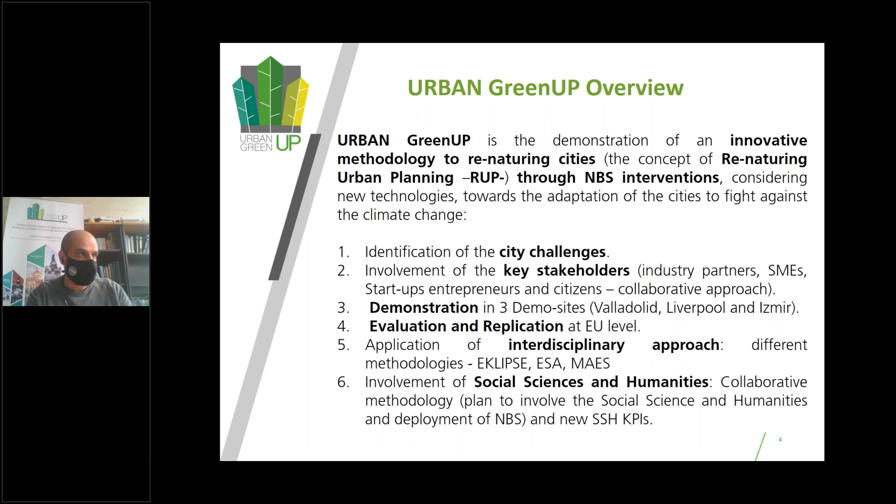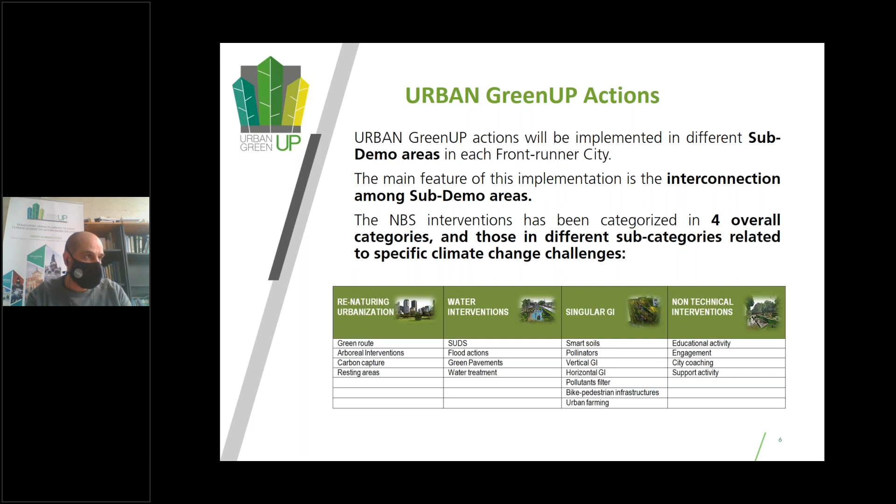This is the structure of our demonstration activities in the project. We are implementing nature-based solutions in different sub-demo areas in each frontrunner city. The main feature of this activity is the interconnection among sub-demo areas, and we have categorized the nature-based solutions into 4 main groups: renaturing urbanization, water intervention, singular green infrastructure, and non-technical action.

It's very important to remark the main impact foreseen in our project. We want to generate a new nature-based solutions market, generating and creating green jobs. We want to increase awareness of the benefits of renaturing cities and nature-based solutions to enhance stakeholder and citizen participation. We want to implement European environmental policies to generate healthier and greener cities, improving living conditions, fostering biodiversity, and also improving mobility and conditions in our cities.

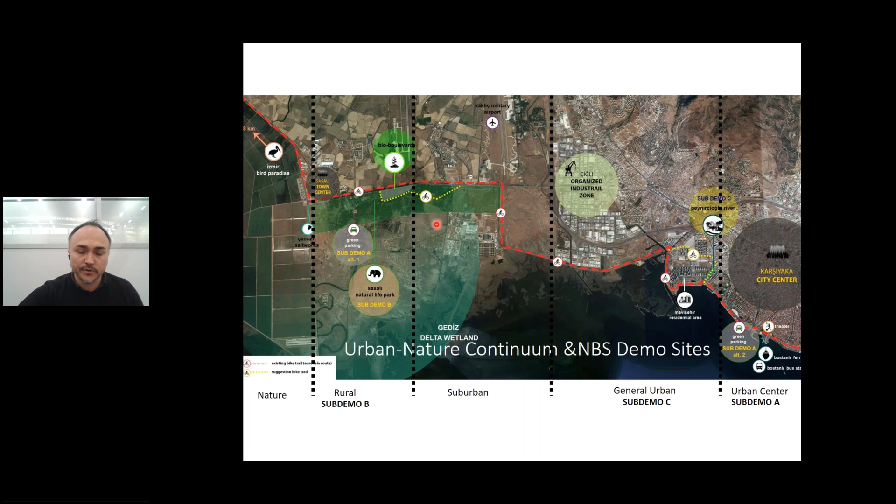We designed a green corridor that connects with the existing corridor and creates a network between rural areas and the city center. At the west part, you can see Çiğli, and there is a rural area of Çiğli, which is also a wetland using a salt work. This area is under threat of urbanization.

And in the areas of singular green infrastructure, we implemented nature-based solutions including smart soil into green shade structures, green covering shelter, green permeable pavement around car parking areas, green shade structures, smart soil production, nature pollinator modules, climate smart greenhouse, development of smart soils, green fences, and fruit walls.

The general impacts of these implementations are reducing the urban heat island effect, improving urban air quality, increasing plant cover and shadow surfaces, reduction of absorption and retention of heat with highly reflective or permeable surface materials, reducing ambient temperature, increased richness and abundance of pollinating species, and increased community engagement.

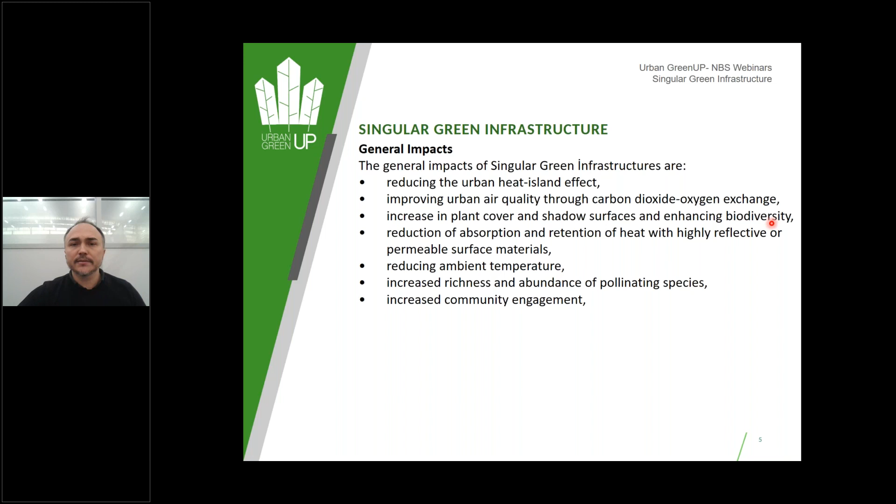The first implementation is the application of smart soil into green shaded structures. The benefits of green shaded structures with smart soils are measured in environmental, economic, and aesthetic or cultural ways.

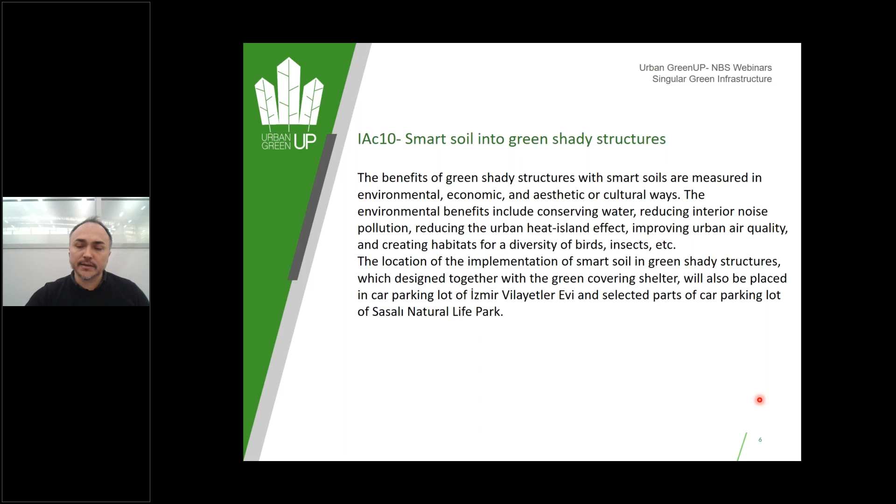We have two implementation areas: Sasalı Natural Life Park here and the Vilayetler Evi car park area here. In Sasalı Natural Life Park, we implemented 338 square meters, and in Vilayetler Evi, we implemented a 150 square meter area of smart soil.

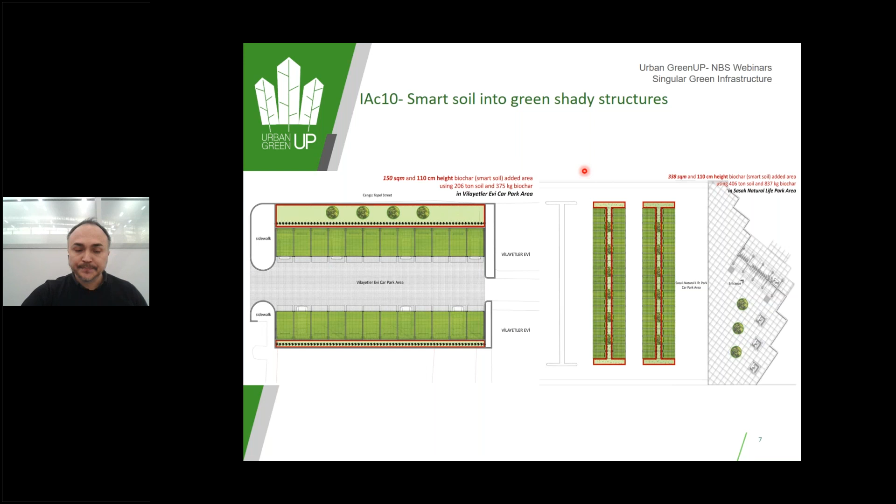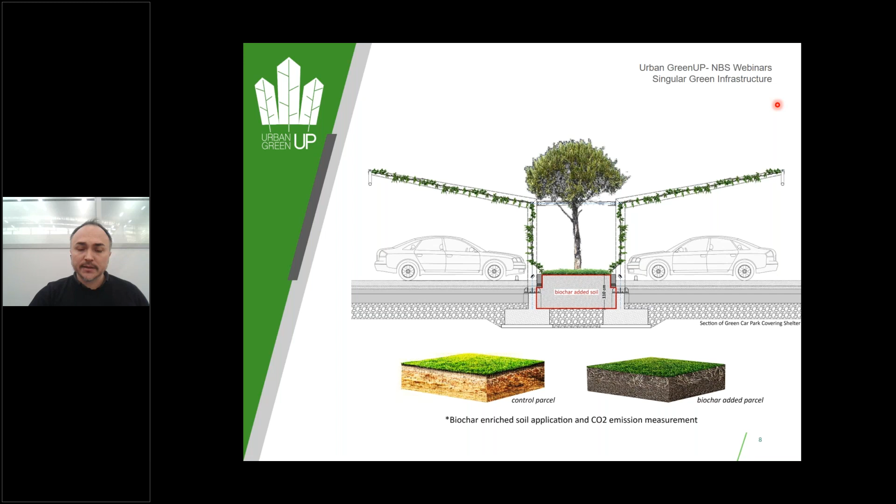As seen in this section, smart soil is applied on the surface of the area where the ivy structures are planted. The height of the soil is 110 centimeters. And you see the application process of smart soil here.

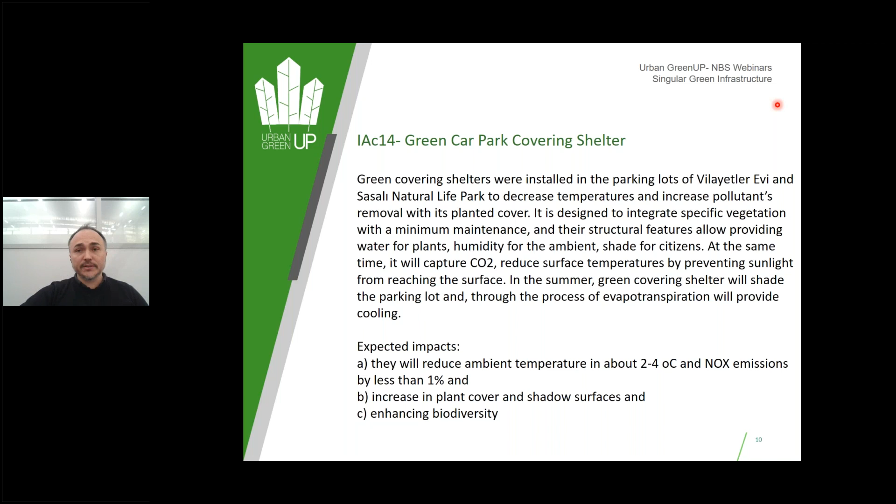Green covering shelter: the shelters were installed in the parking lots of Vilayetler Evi, the same with the smart soil, and Sasalı Natural Life Park, to decrease temperatures and increase pollutant removal with its planted cover. It is designed to integrate specific vegetation with minimum maintenance, and its structural features allow providing water for plants, humidity, and ambient shade for citizens.

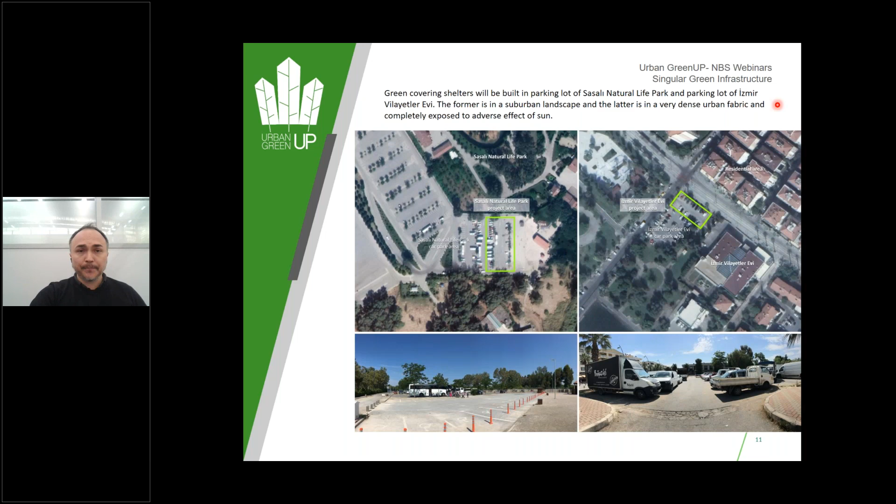Same as the previous implementation, we have two demo sites for this section. On the left side you see the Sasalı Natural Life Park, and on the right side you can see the Vilayetler Evi car park area. This is one of the final views of the green park covering shelter. As seen in the photo, it is planned that the ivy structure will cover the whole roof by climbing this structure.

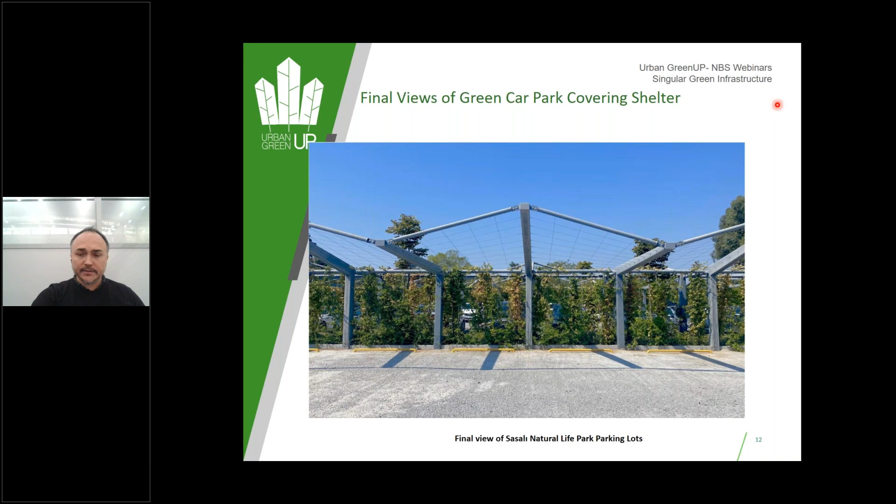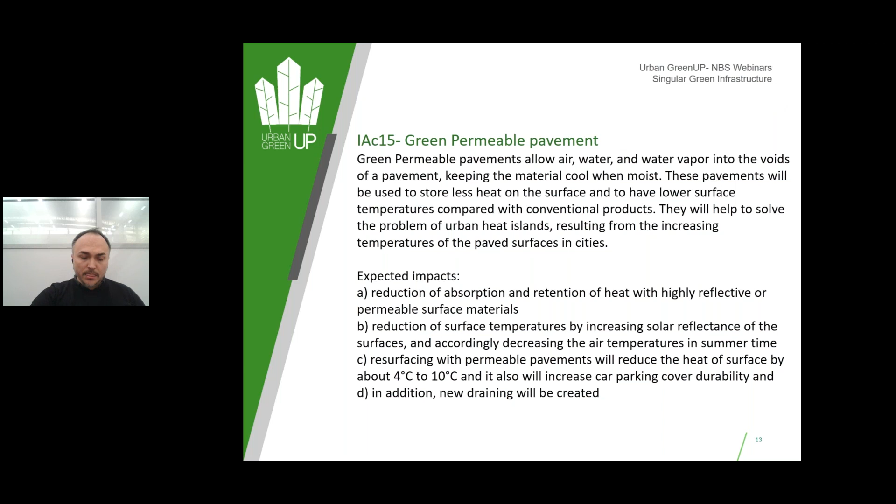The other implementation is application of permeable pavement surrounding parking lots. Green permeable pavement allows air, water, and water vapor into the voids of the pavement, keeping the material cool when moist. We implemented two different types of permeable surface here. In Sasalı, we preferred permeable concrete, and in Vilayetler Evi we used cube stone, a permeable cube stone.

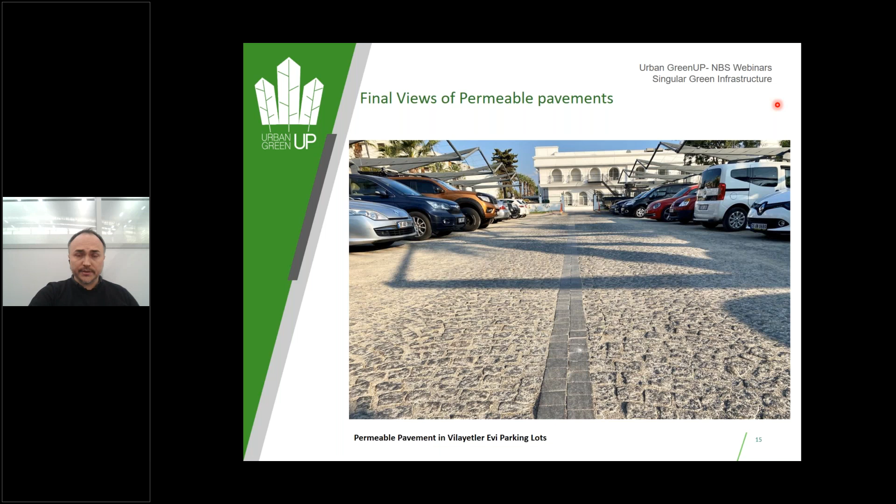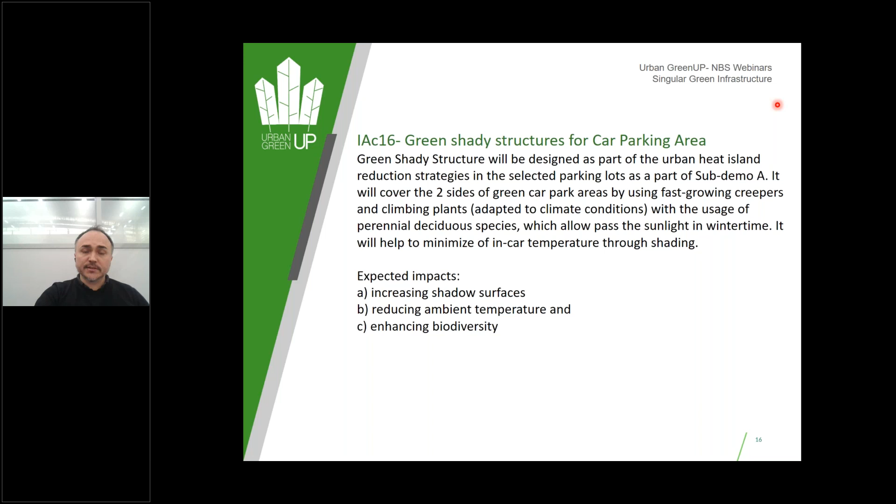Another implementation is green shady structures in parking lots. This implementation helps increase the shadow surfaces in parking lots. The ivy structures are designed to be planted 3 roots for each 1 meter length of the wall of the green covering shelter, and planting will be done by investigating different conditions of the green covering shelter, such as the angle of sunlight, sun shadow ratio, and amount of space for plants.

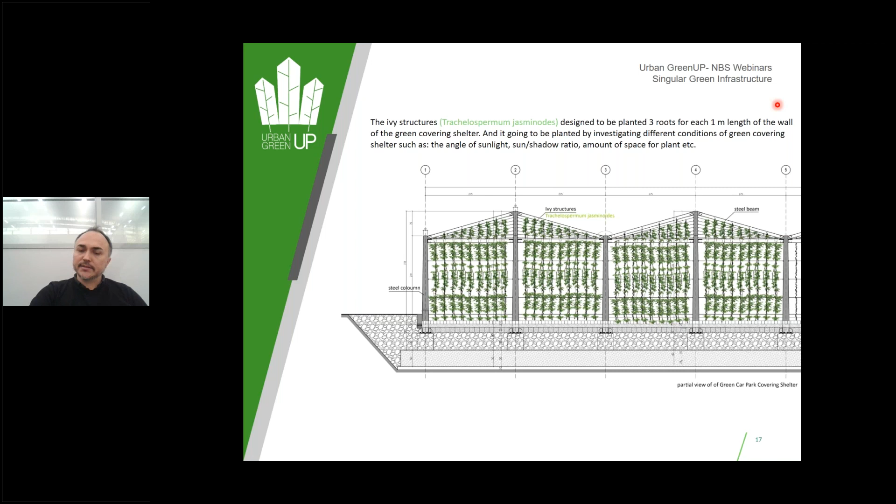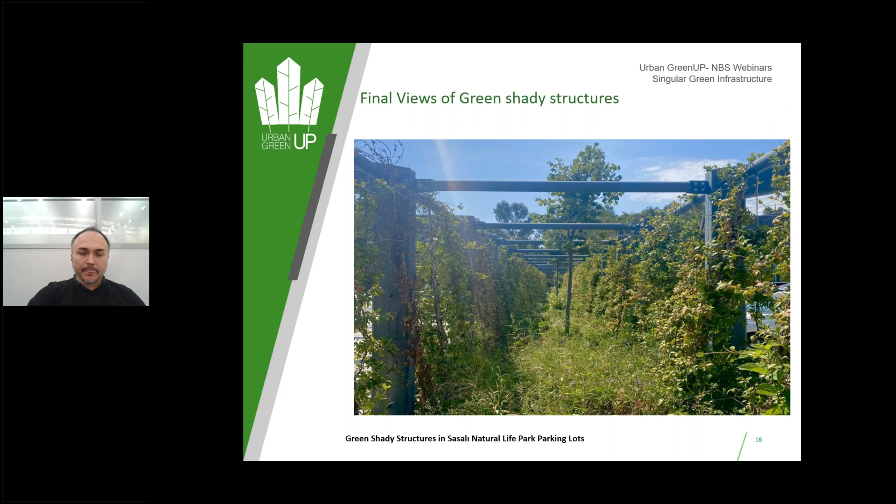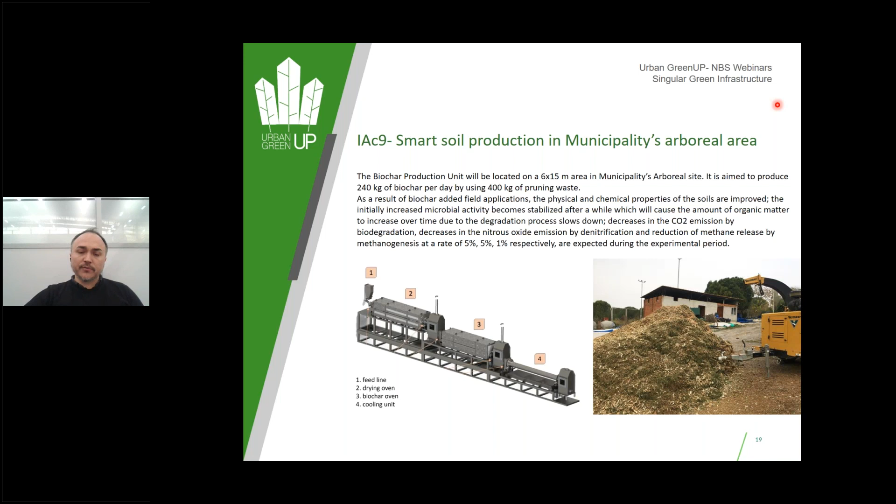Smart soil production unit, biochar production unit, will be located on a 90 square meter area in the municipality's arboreal site. It is aimed to produce 240 kilograms of biochar per day by using 400 kilograms of pruning waste.

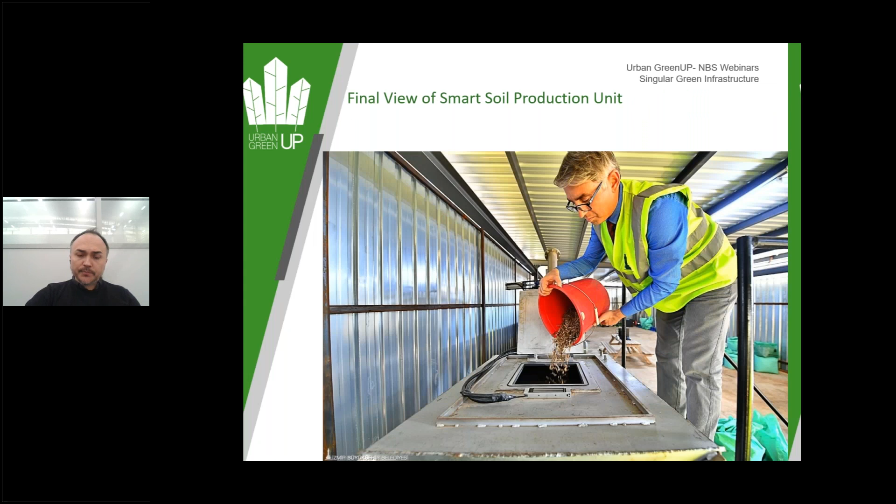These are the final views from the biochar production unit. First, we put the pruning waste into the production unit, and after 1 hour of combustion in an oxygen-free environment, biochar is obtained. Then we use biochar in landscape.

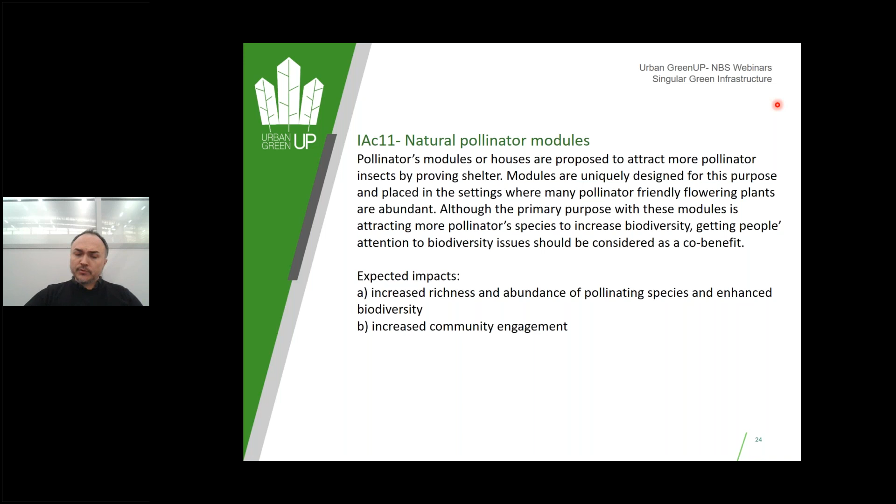Another implementation is natural pollinator modules. There are 10 modules alongside Bio Boulevard in Sasalı and around Peynircioğlu stream. The main purpose of this intervention is attracting more pollinator species to increase biodiversity. This is the final view from pollinator modules from Sasalı.

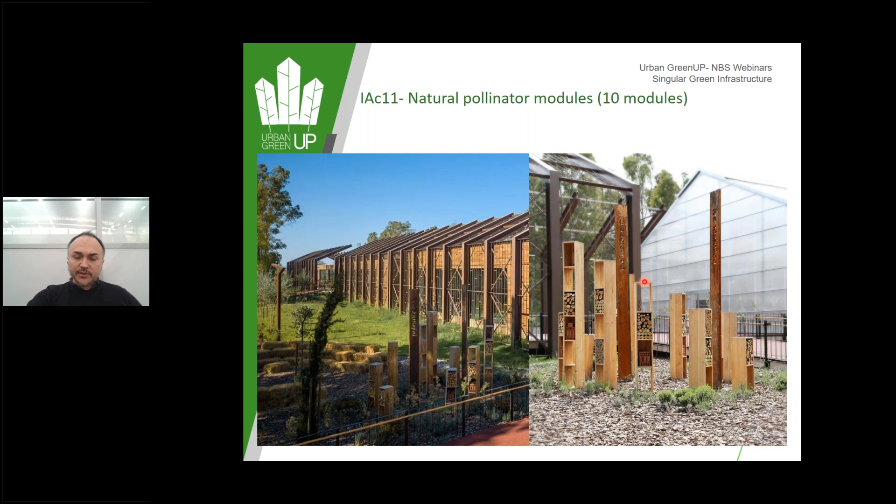The aim of this is to increase the efficiency of pollination in those modules. We plant lavandula around them. We located oak wood, pine cone, bamboo, perforated brick, and willow branch inside the modules to accommodate different species of bees and bugs. And this is another final view of the pollinator house module around Peynircioğlu stream.

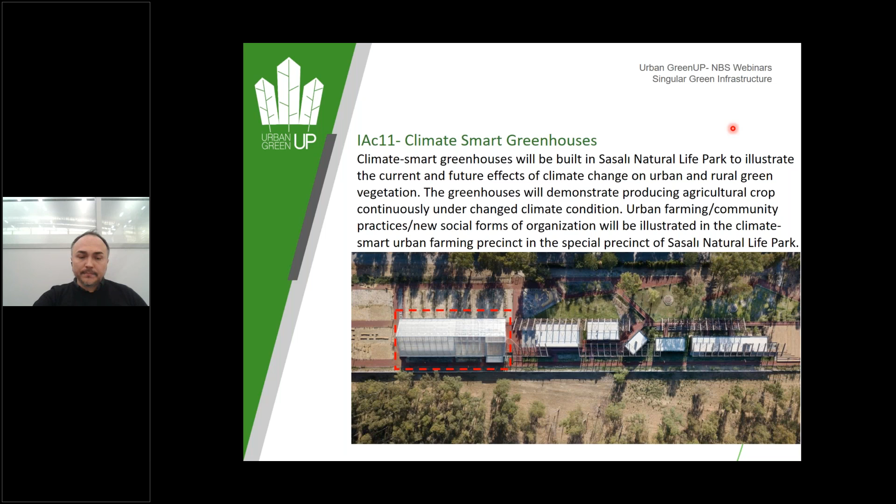Climate smart greenhouses: the greenhouses built in Sasalı Natural Life Park as part of Izmir Agricultural Center. This intervention illustrates the current and future effects of climate change on urban farming. We use 3 layout plans here.

In part 1 here, the smallest greenhouse, 167 square meters in size, demonstrates the effects of changed climate conditions on soils and plants. The second part is about 216 square meters and demonstrates the parabolic solar heating system and also the use of solar energy for lighting.

And there is the soilless agriculture system here. The biggest one, the last greenhouse, is approximately 540 square meters, and vertical agricultural production units are planted here.

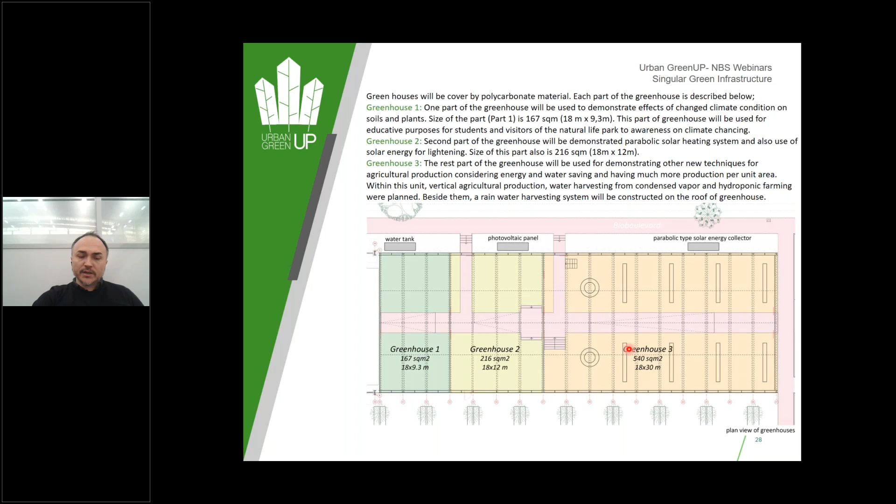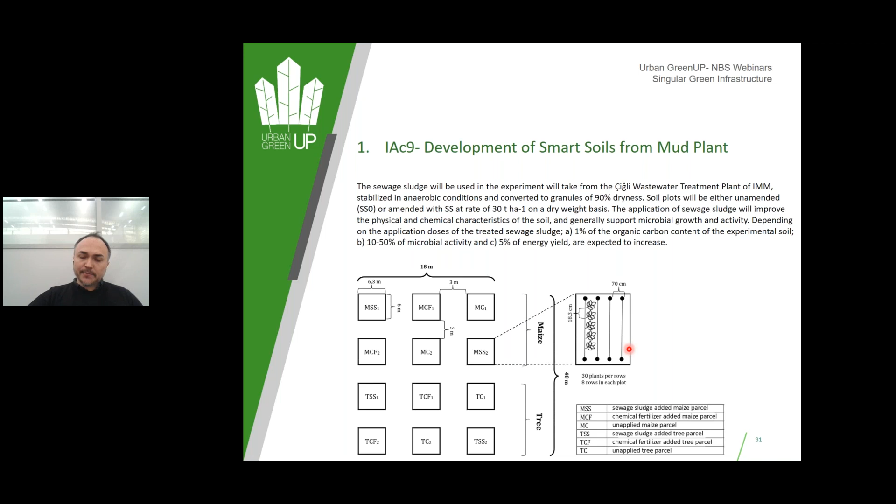Development of smart soil from mud plant. The raw waste which will be used in biochar production should be considered for different purposes of application. This is a diagram of the invention plan. We use maize plants and trees to compare the implementation parcels with each other.

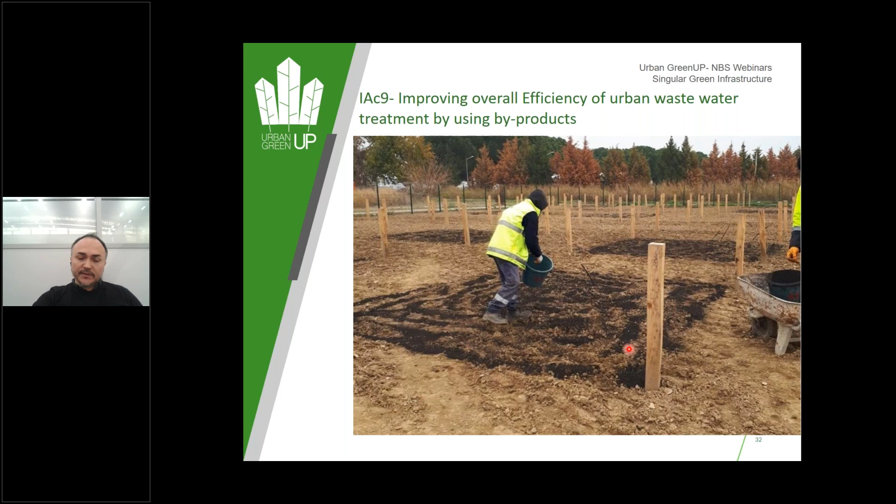This is a view from implementation progress of the maize plant agriculture area and preparations of our experimental field area. The next process for the area surrounded by fencing is the parcellation with a drip irrigation system. And these are the final views from the agricultural parcels.

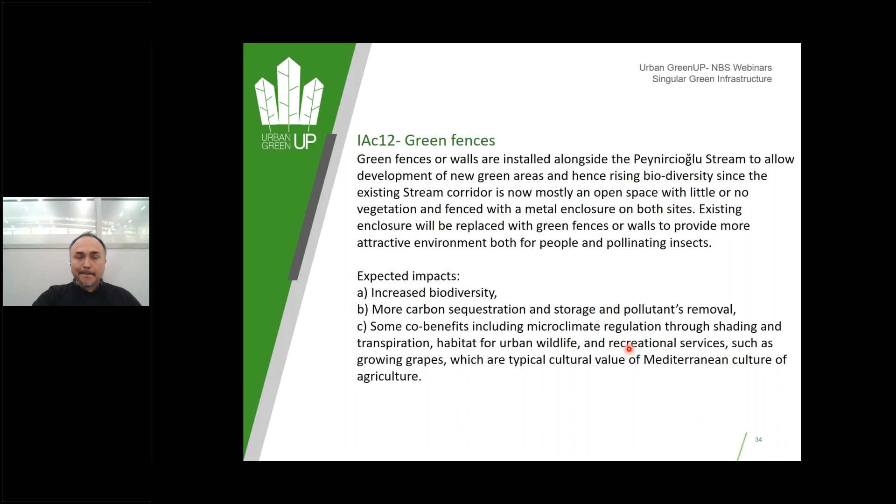Green fences are installed alongside the Peynircioğlu stream to allow development of new green areas and rising biodiversity, to provide a more attractive environment both for people and pollinating insects. This is the final view from the green fences. The ivy structures are starting to cover the fences. In some part of the area, we take away the green fences from the stream to create new green areas and vegetation areas along the stream.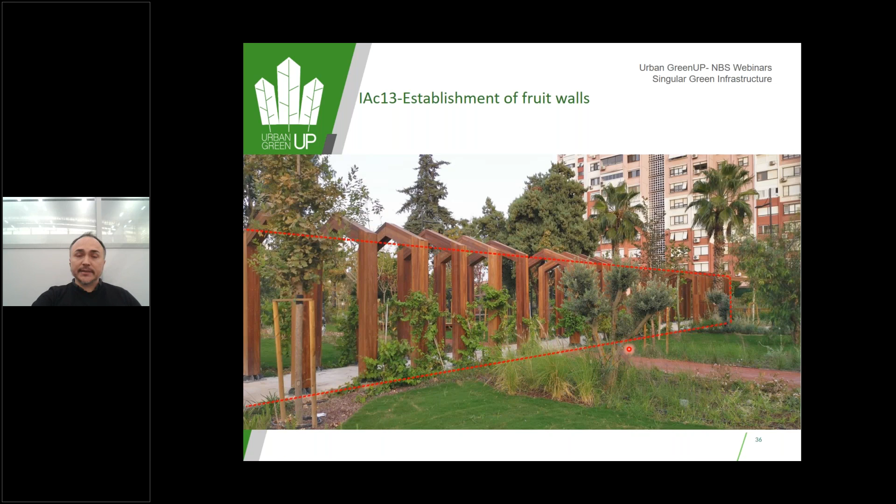Fruit walls are planted along decorative wood shelters in some parts of the area. Grapes and blackberries are planted here, and they cover these areas. This is a view from the wood shelters, and you can see the grapes here. This is a view from the launch area. The back of the launch is used as fruit walls, where grape and berry plants are also planted.

Thank you for listening to me.

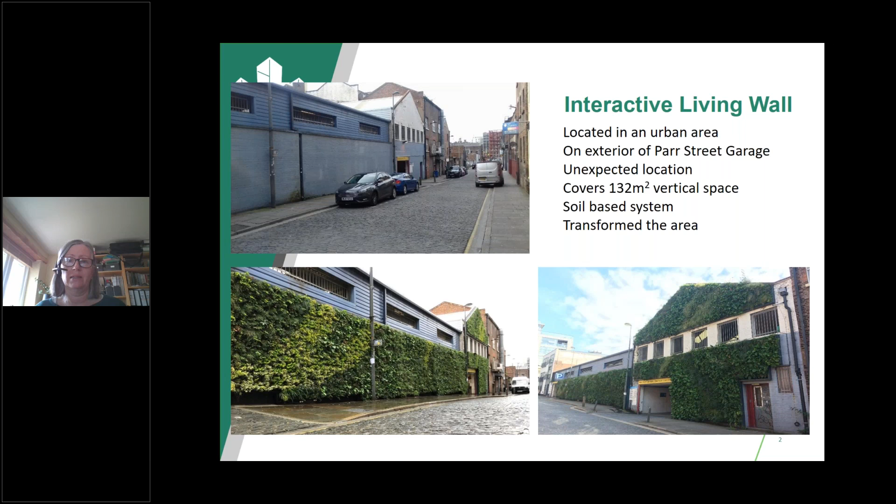This green wall covers about 132 meters squared of vertical planting. It's a soil-based system, irrigated by mains because we're unable to collect enough water from the roof to put in rainwater harvesting at this site. The planting itself has over 12,000 different plants, 19 different species, and we have something we call monthly discovery planting. What that means is that throughout the year, as you walk along this road, the green wall changes in terms of the plants you can see.

We start in the spring with early things like daffodils on the top left. We have a range of flowering plants, and towards the winter months, we have things like red-berried plants. This makes the wall constantly interesting, and it's interactive because you can get up close, you can touch it, and in the summer you're actually able to pick strawberries from the wall as well.

The green wall's become something of a landmark in our city. It forms part of our green corridor route, and it's now featured in a number of city and city region promotions, competitions, and publications. Most recently, it was used as a commercial to encourage girls into science. It's had lots of attraction, lots of publicity, lots of photography. People go there quite often to get their photograph taken. We've also had a number of inquiries from developers keen to replicate something similar.

You can see here that the wall focuses very much on foliage types. The wall doesn't have the best sunny aspect, so we are limited on the types of flowering plants, but we've still been able to create quite a lot of interest with the different planting.

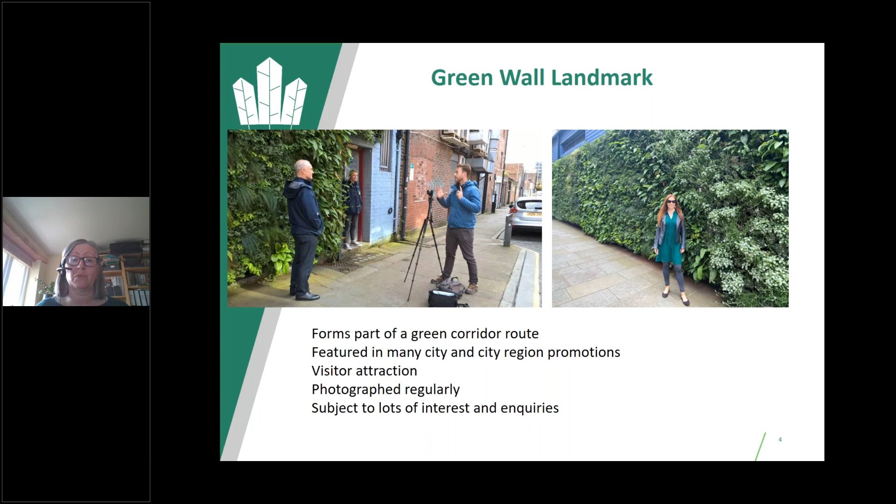In terms of other vertical greening, one of the other innovative solutions we've been testing is something called the Smart Pollinator Pillar. This is a planted system that wraps around a street lamppost. It has a solar panel at the top and a black irrigation reservoir at the bottom.

The solar panel powers a very small submersible pump that pumps water up and irrigates all the planting. The planting irrigation reservoir at the bottom, the black bucket, has a small sensor that connects to your phone and lets you know when the water level is low. We have a mobile app that helps to control irrigation.

You can plant lots of different types of plants. We can plant for biodiversity and pollinators, for colour and impact, or we can put in species that will help to improve local air quality, for example. You can also add insect homes or bird boxes.

We don't actually have a bird box on this one. That's a fake bird box that's actually hiding the pump, but you can include them on some of the other ones. We've used these as route markers for green routes, and we've also used them to introduce biodiversity as stepping stones in urban areas where it's been almost impossible to retrofit anything else.

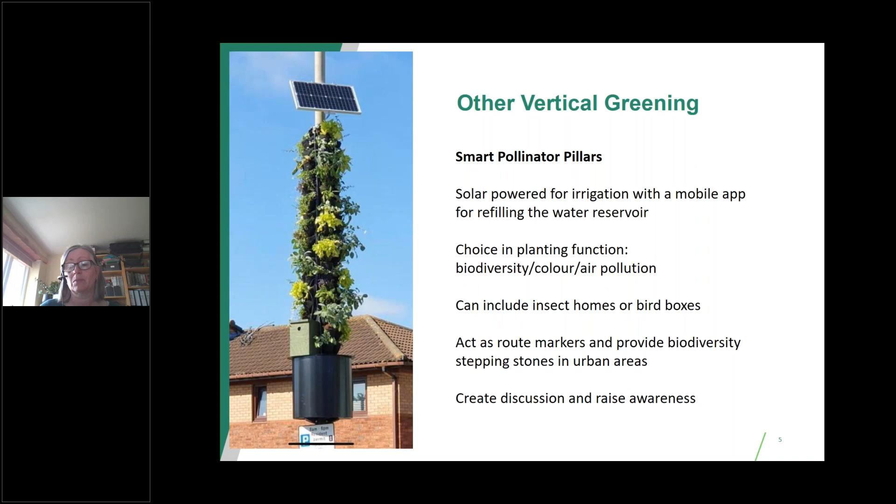They've been very good for creating discussion and raising awareness. We've had some issues over the winter with them, but I'm hoping that now we're coming into the summer months, we'll have some good colour and be able to see how effectively they can perform.

This is a freestanding, roughly 2-metre high green fence that will be planted in a key retail area adjacent to a very busy road in the city. We're going to be looking here both at the biodiversity impacts this can have, but importantly, we'll be looking at the air quality impacts.

We'll be undertaking monitoring in front of and to the rear of the wall, and also mathematical modelling, comparing the two. We think this wall will have an impact on dispersing the pollutants from the vehicles on the nearby road.

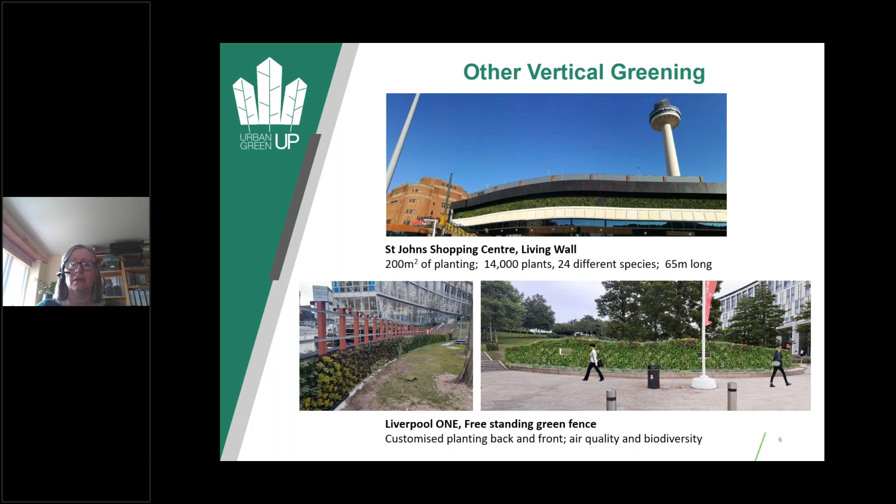We complemented this by working with a TV program that repurposed an old cabinet and added some habitat features to create a bug hotel. Now the pollinating insects that come to feed on the plants also have some shelter and somewhere to overwinter, which is really important. That repurposed cabinet is also now on that balcony.

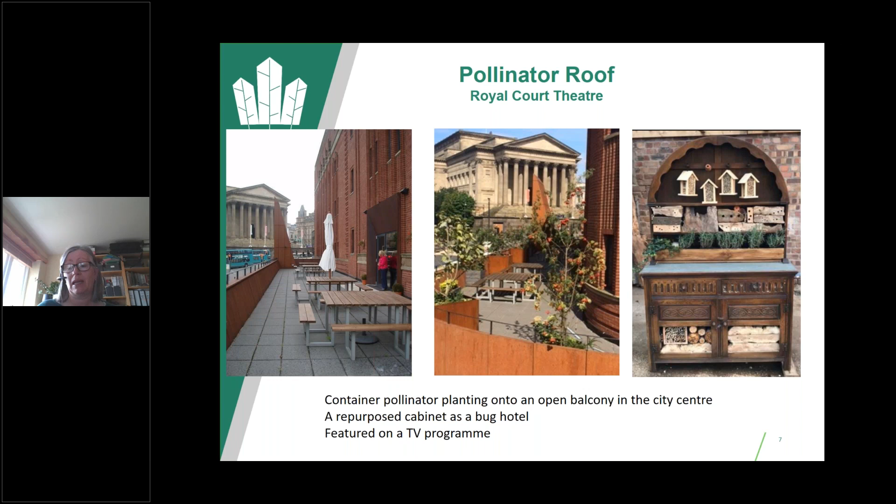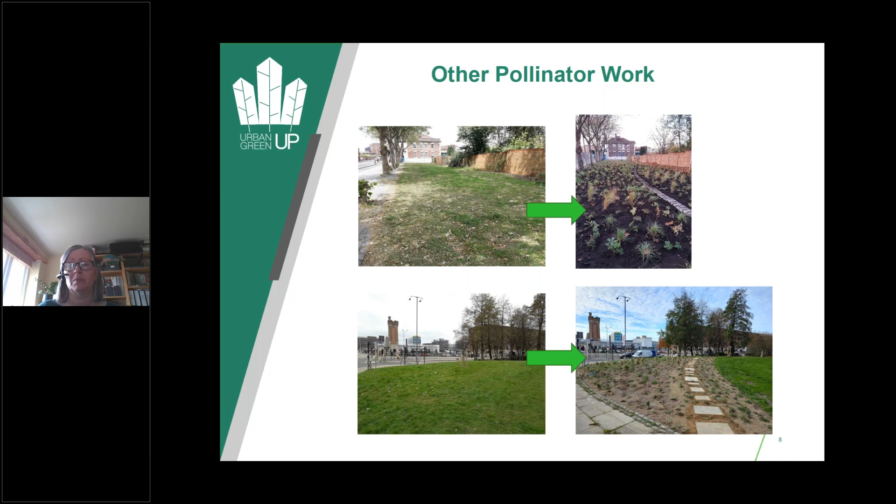Where we have done our sustainability pollinator works, we've tried really hard to use as many sustainable techniques as possible. We've used organic seeds and plants, reused materials between sites, and tested some different ways of preparing the site, including using a flamethrower.

That was very useful for areas around tree roots where we couldn't dig very easily without damaging them. We've also done some quite deep turf stripping, shown in the bottom left picture, to help remove the weed seed bank and discourage weeds. And in the bottom right picture, we've tested a range of acetic acid or vinegar mixes to look at weed clearance. Unfortunately, they ran out before they quite finished.

So I do have a demarcation line between the two. We would need a couple of applications, but the acetic acid is much more friendly, and all of those are much better than using chemicals or herbicides. Elsewhere, the top left picture shows some other examples where we've used natural products like jute netting to retain moisture and suppress weeds on sites. So that's been quite an important element of putting these pollinator sites in.

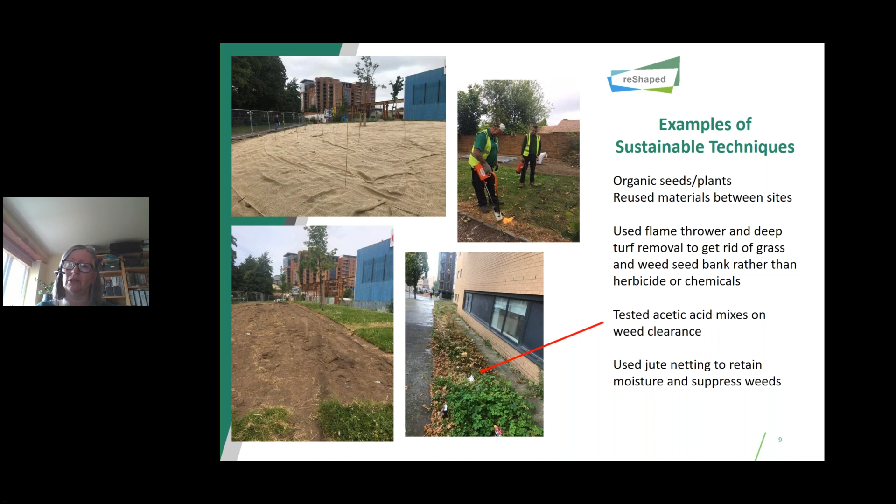In terms of data, we've generated lots of data, got lots of graphs and lots of observations. It is still being evaluated, but it's looking good. We're looking not just at pollinators, but also at things like thermal imaging and air quality, and we're hoping to build up a story for each of the different interventions over time.

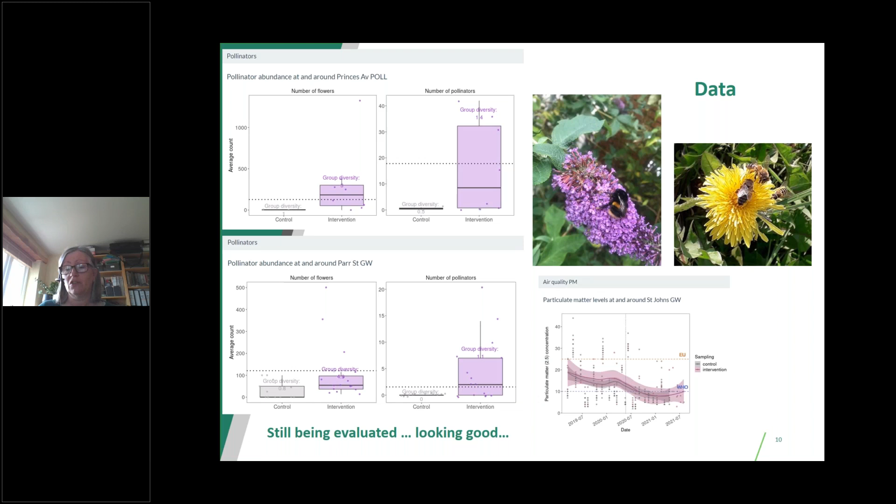I just wanted to finish quickly on one of the other ways we're using and analysing our data. This is a model working with Liverpool John Moores University called EcoservR. The way this works is we have seven ecosystem services listed, from accessible nature right down to water purification, and then values against them, which are percentage increases from the baseline.

In each of the demo areas shown on the map to the right, marked by black lines, with the green areas being additional sites we've worked with, we made an assessment of the natural capital value for those ecosystem services in that area before the project started.

Since then, we've introduced a range of different interventions, and we are now calculating the percentage improvement in that area as a result of these interventions. The reason this modelling information is so helpful is that many of our interventions took place during lockdown and COVID.

So if, for example, in top demo area B we had recorded a 15% improvement in air purification or air quality, many people would quite rightly argue that that was a false data set because it's been heavily skewed by the fact that people were in lockdown and vehicles weren't moving around the city. And they would be right. But what this modelling allows us to do is place our information in context.

So if we have monitored a 15% improvement, I'm able to say, looking at the air purification figures, that half of that improvement is due to nature-based solutions and the other half is an impact of the COVID lockdown. This is going to be really helpful to help us make sense of our data during some difficult times.

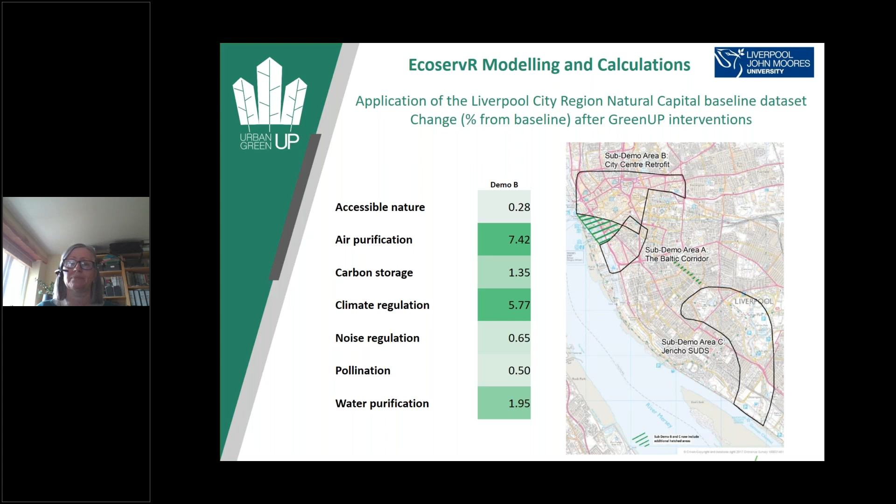The other thing I like about this model is that we're able to show this visually. So this is about pollination capacity in demo B again, with yellow being areas of really high pollination capacity. And if you look in the center there, we have a small cluster of circles, though I don't know whether you can see them just here.

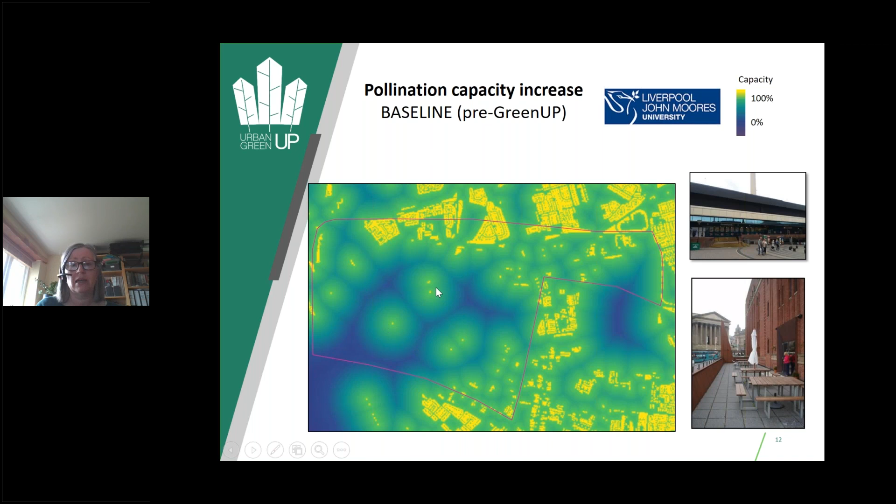They represent the before, that's before the green wall and before the pollinator roof. But then, post the pollinator roof and green wall going in, we see this new circle appear, and we have this almost visual demonstration of a whole new area of really high pollination capacity as a result of the wall and the roof. So that's going to be really helpful.

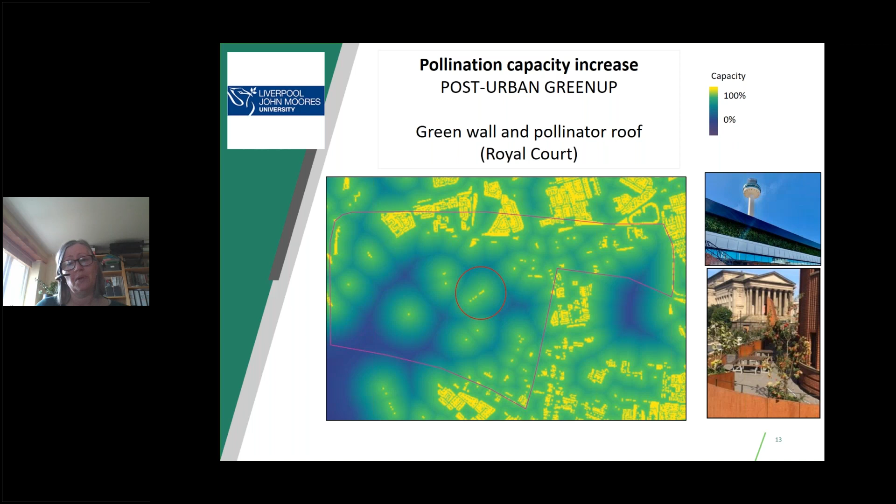So that's all I've got time for, but I hope that's given you a bit of an insight into some of the work we're doing at Liverpool. If you've got any additional questions, please do contact me and get in touch. Thank you very much.

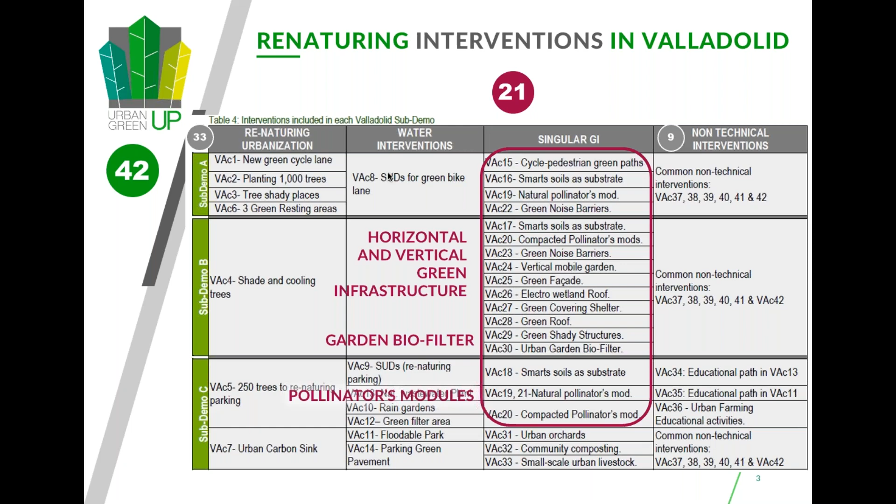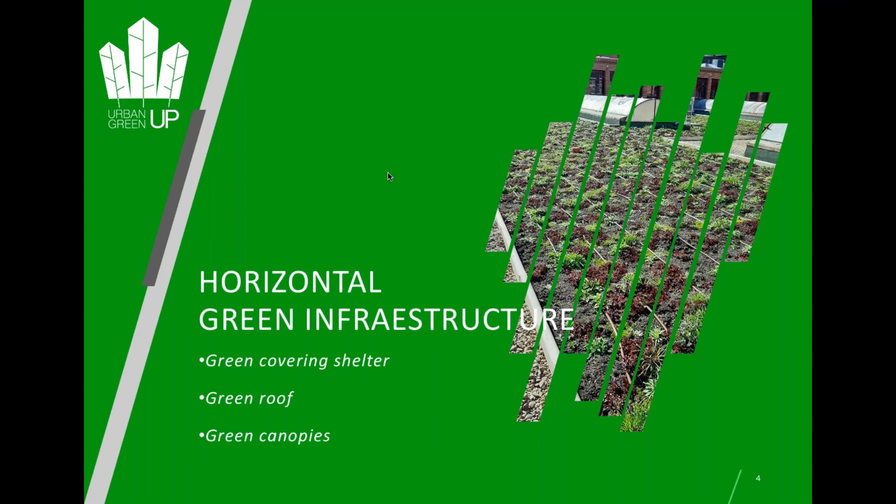So let's go to the horizontal green infrastructure. I will show you three examples: the green covering shelter, the green roof, and the green canopies.

This is our green roof in España Square, our green covering shelter. Below the covering shelter there is a daily fruit and vegetable market, and it's a very well-known place in the middle of the city.

The green area does not cover all the marquees because they are quite old infrastructure, and this infrastructure wouldn't support the extra load of the green coverage, although it's very light. The total area is almost 500 square meters, and in the rest of the square there are no other green areas apart from some plants in pots. We can see along the year how it changes between brown, green and yellow colors, because it has different species and different flowering along the year.

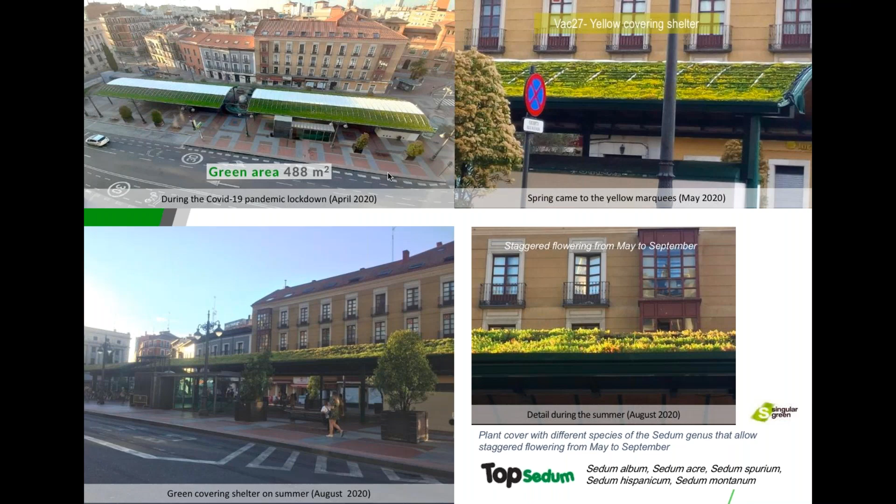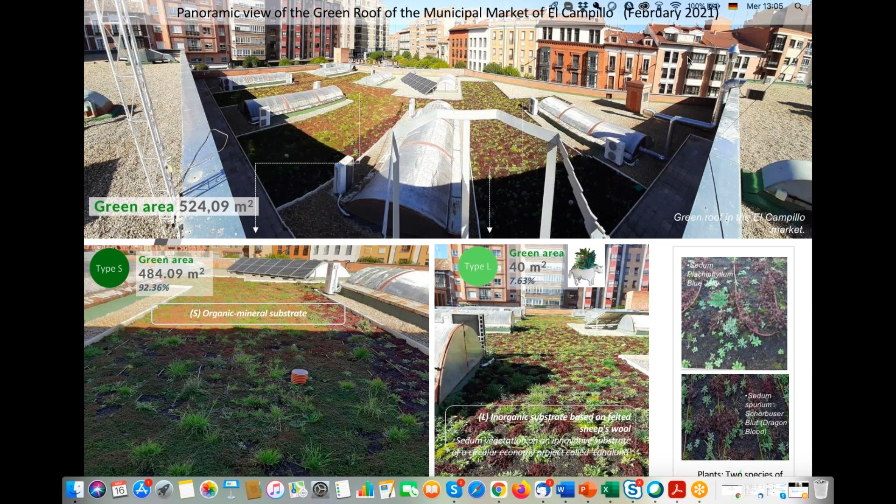Another example is something we have implemented here - it jumped two slides but it's okay, there was an animation that changed by itself. You can keep it here or go back to the previous one - let's see, yes, just stop here, I can continue from here, it's perfectly fine because here you can see what we have implemented.

The previous slides showed how it was in the ex ante scenario - this is a municipal market named El Campillo with a completely horizontal surface which was not used, and was in a very bad state of conservation. We constructed this new green area of 525 new square meters, planted with two different types of native sedum. This coverage is very light, like the previous one, and we are comparing the growing of these two different types of species, shown in green color and red color. This new green area is on a roof, and it's completely walkable.

You can walk through this roof, and we expect delivering some non-technical activities here in the future with citizens and students and so on. We are using two different types of substrate to demonstrate the differences between them, so it's also like some kind of research study.

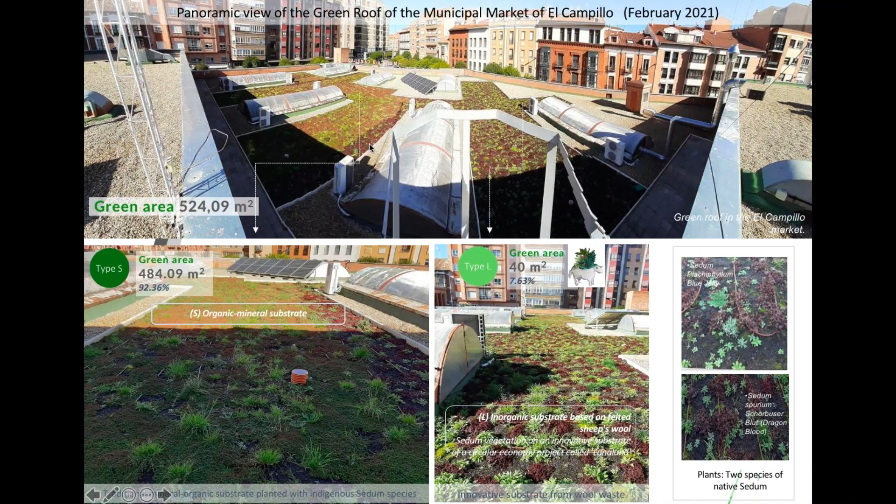It will happen the same here - we've jumped directly, but it's fine. These are our green canopies, a very innovative green infrastructure. The previous three examples were designed by one of our colleagues in the URBAN GreenUP project. The company is called Singular Green, and they also designed this very innovative technology of implementing canopies and covering them with green. Along the street, these canopies are 21 units in one street of the city center of Valladolid.

It's also planted with plants that make this type of curtain. This photo was taken last summer when this green curtain was very long and quite impressive. What we see now, although we didn't see this green curtain in winter, we noticed it has flowered again - we see the violet and white colors of the green canopies. So I invite you to come to Valladolid to see this magnificent intervention.

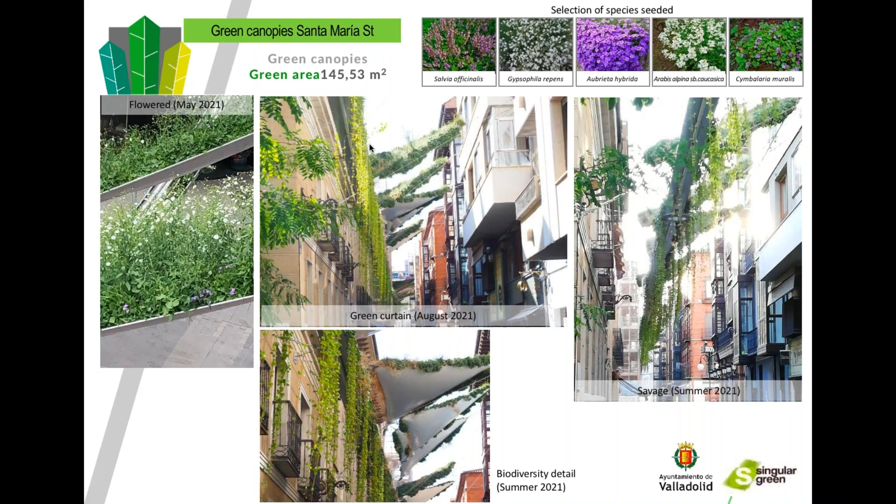Let's go to the vertical green infrastructure - three examples: the green facade, the vertical mobile gardens, and the green noise barriers.

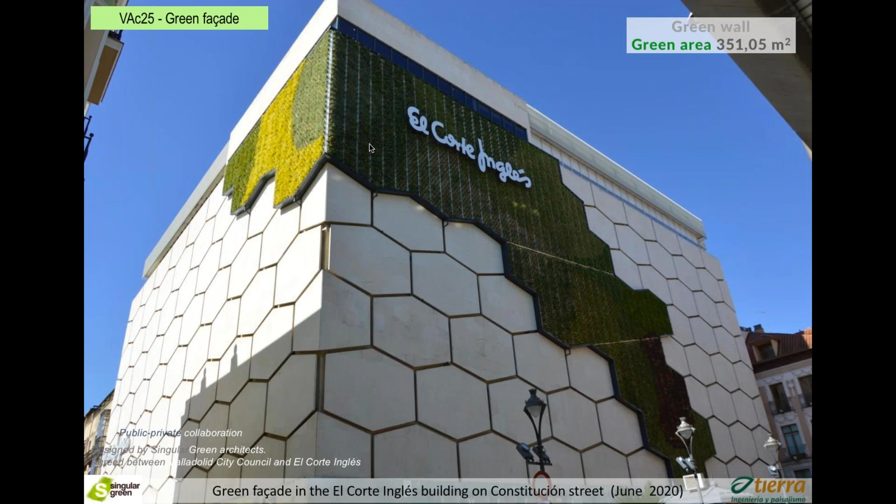This is the ex ante, how the building of El Corte Inglés department store looked before the implementation, and this is how it looks now. This photo was taken when it was recently planted, two summers ago in June 2020. Now the vegetation has grown up, so it's even more impressive. It's developed on a private building that belongs to this department store.

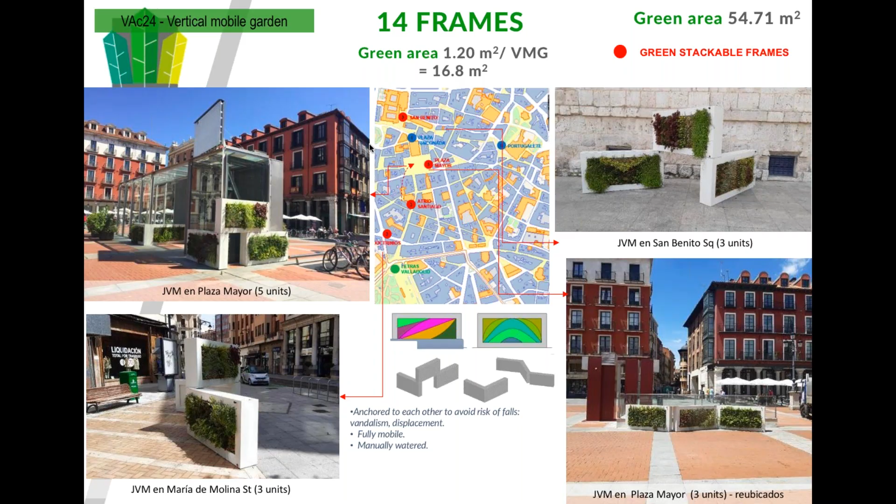The green noise barrier has a double benefit expected from this innovative green infrastructure, also designed by Singular Green. The first objective is acting against noise, and this barrier is located in the middle of a road with a lot of traffic, with two streets to one side and two to the back. It has been studied as a street with a lot of noise according to the noise map of Valladolid.

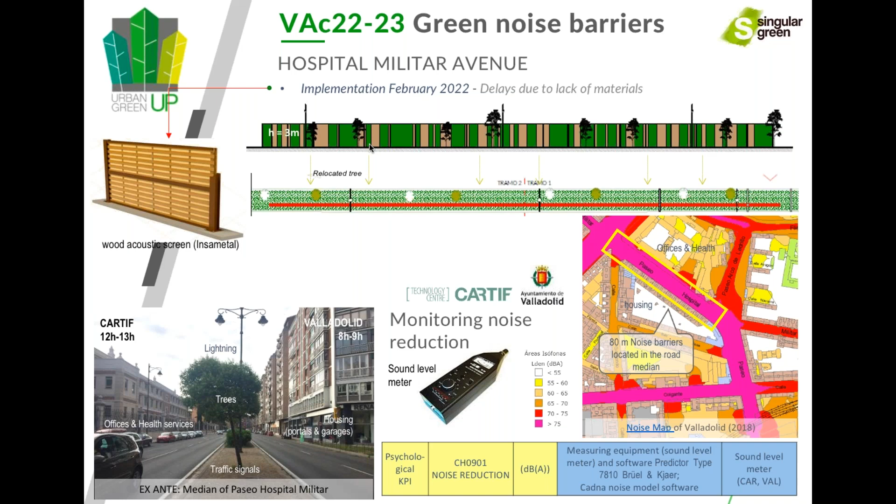Here are a few photographs of these new green noise barriers. It was recently planted, so the plants are small; we finished this implementation last month, and this photo has about 15 days, so we expect to see in spring how this green infrastructure grows. It's a typical noise barrier, but instead of metal it's constructed of wood, covered partially with vertical garden panels. The total green area is almost 300 square meters, with 80 meters length and 3 meters high.

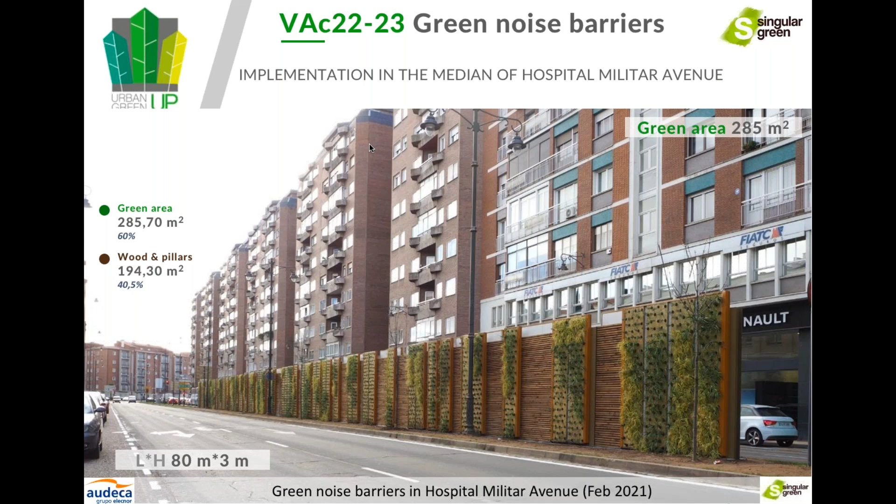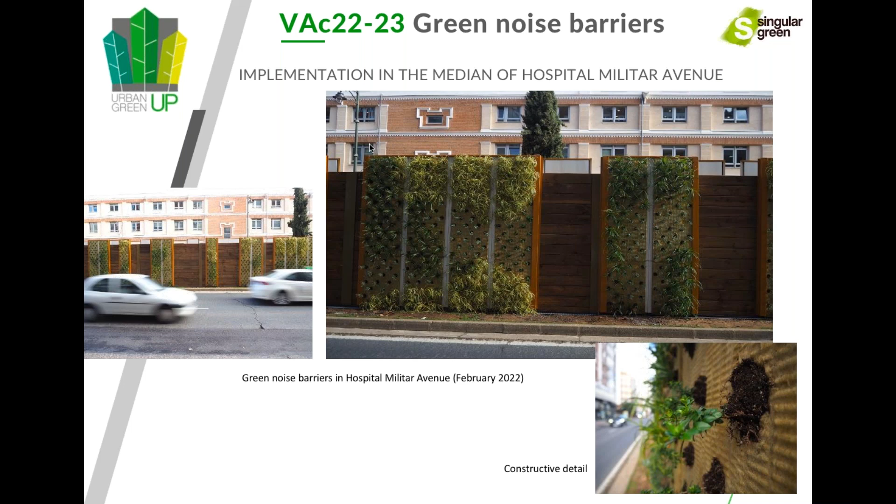Some photographs show the aspect of the cars in front of the barrier, and some details of the plants. We expect that it will grow very well.

Let's go to the urban garden biofilter. This singular green infrastructure has been designed by Cartif Technology Center, who are also the coordinators of the Urban GreenUp project. This innovative infrastructure aims to clean the air extracted from an underground parking, so it's not a normal garden. What it does is clean the air, retaining particles and nitrogen oxides.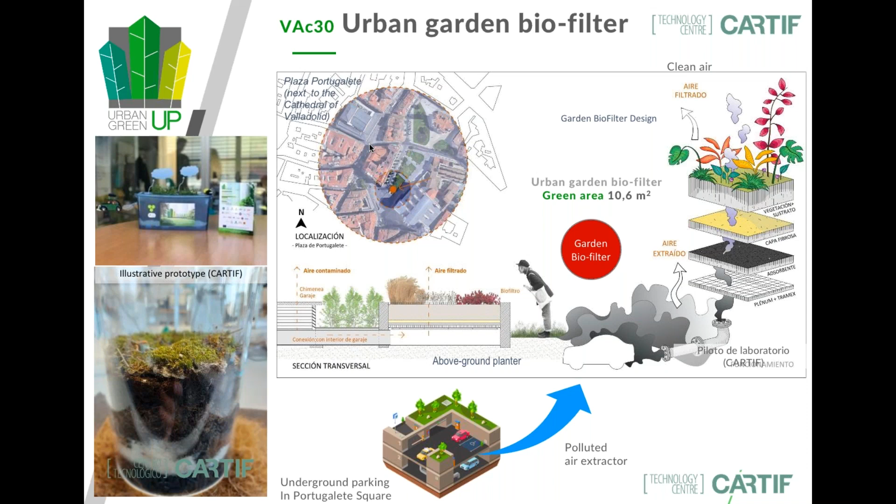This is the biofilter, quite recent. As you can see at the top there's a metal layer, for safety reasons. It's located next to the cathedral, close to the other infrastructure I showed a few minutes ago. We've also implemented a sign to show citizens what it's about, how it works and its purpose. Below this biofilter you can find an underground car parking; it takes part of the air from the car parking and cleans the air that is launched to the outside.

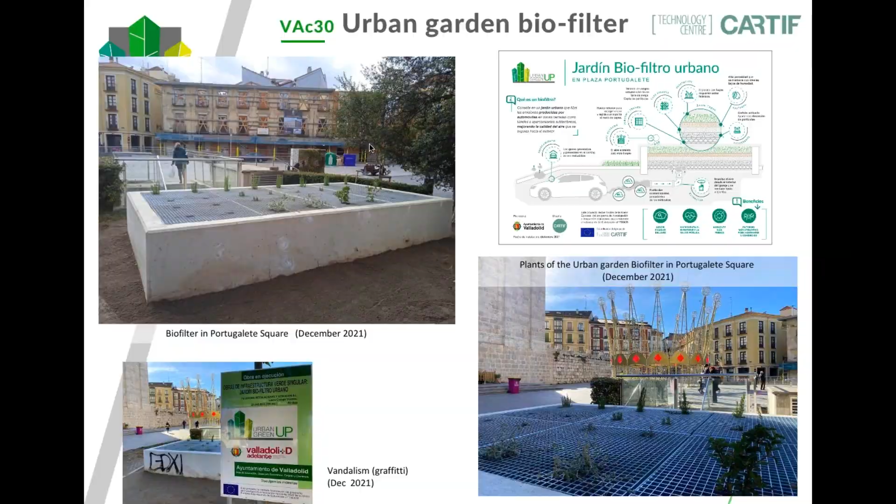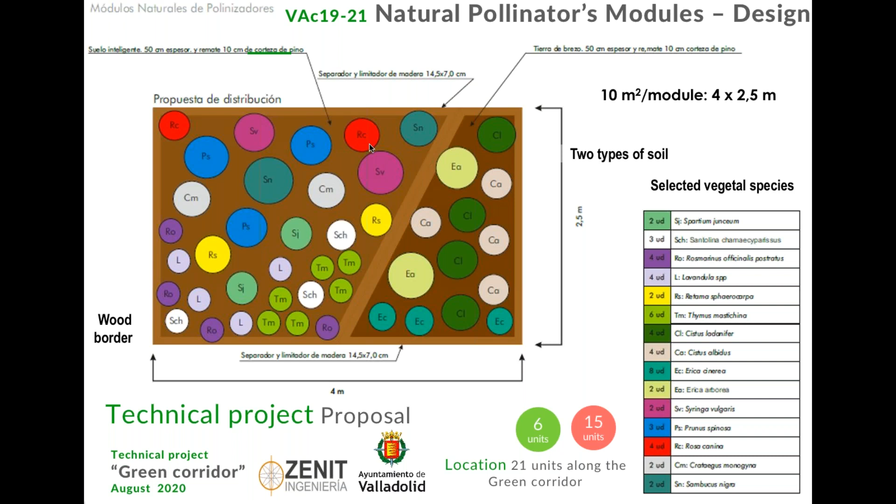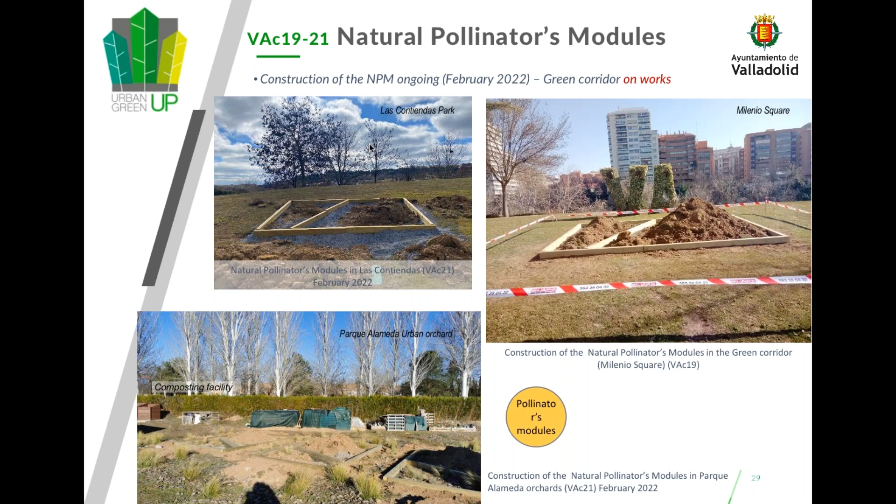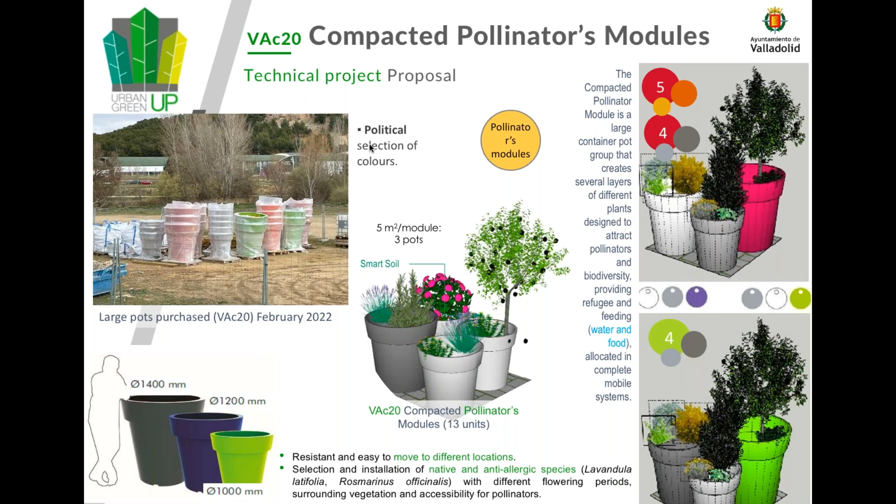We designed different compositions of different plants according to sunny places or shadow places, and according to the different types of soil that we are using.

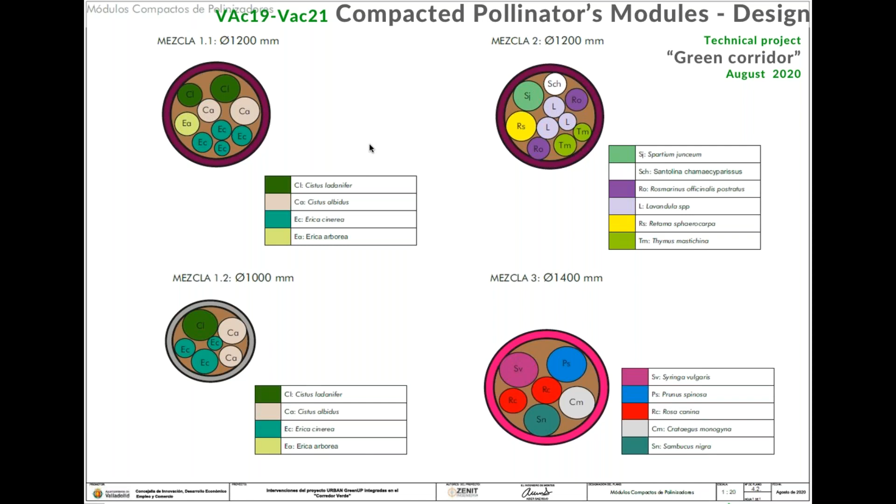And that's all from my side. Thank you for listening, and there you have my contacts, and I'm ready to answer your questions. Thank you very much, and thank you, Julio, for your technical support.